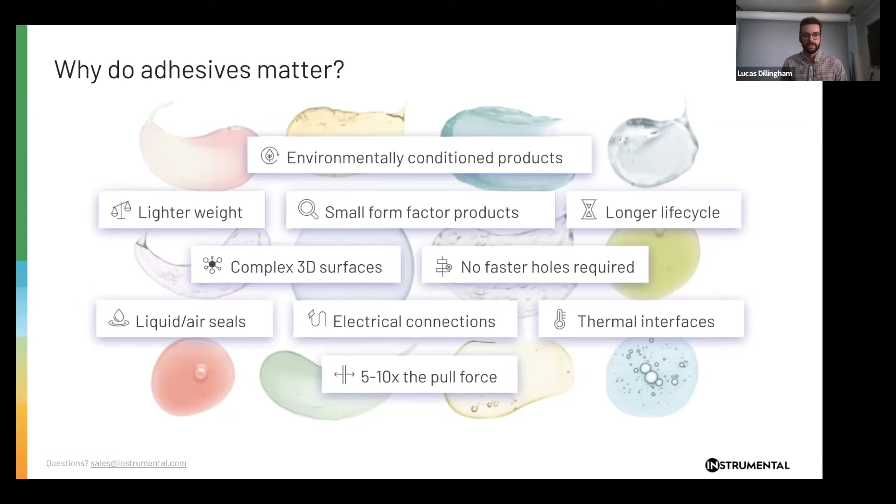Excellent. Well, yeah, the good news is very wide variety of applications, but with that comes a variety of different issues that we have to tackle. And just to give a sense of the scale of these issues, we collected 3 million data points from Instrumental customers. This is from ramp and production units over the past couple of years. And of those, the number one issue was glue issues. And this added up to about 0.7% of all units, so pretty significant.

And the types of issues, again, huge variety of different issues, overflow, missing, misplaced, all the common ones, and also some bizarre ones. And fortunately for these specific use cases, they were able to identify these issues with Instrumental and then address them, prevent them from actually being shipped. But for other applications where they might not have this type of coverage, this could be a significant number of issues that are escaping into customers' hands. Lucas, have you seen similar types of issues?

Yeah, I mean, we get involved a lot, I'll say in a firefighting mode, when a particular program is going through ramp or launch and they're getting adhesion failure, right? And it can be hard to pinpoint exactly where it's coming from. And if somebody were to come and ask me anecdotally, hey, what do you see? One of the things I'm going to pick up on immediately is, adhesion failure is a huge issue, right? And typically we deal with it. We try to figure out what's going on, but they're very hard to root cause.

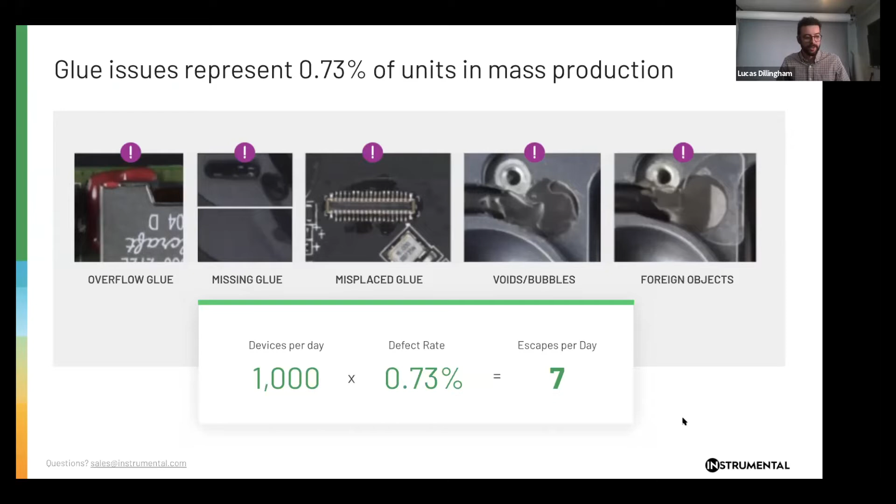Yeah. So let's talk about why is it so difficult? Why do so many different companies struggle with optimizing these glue processes? I can share one story that's burned into my mind from my days back at Apple. There was one specific application where we had a flexible printed circuit that was coming off the touch sensor, and we wanted to bond it to the housing. This is to prevent translation during a drop of the phone.

This was on iPhone. And the number of different variables that we had to take into account when we were optimizing this was just off the charts. Again, this was in a very tiny space. So we were looking at, even just to start off, the basic glue composition, different curing conditions, different UV wavelengths, then just looking at compatibility with the surfaces, contamination of the surfaces. And that's just the nominal.

Then you have to look at, did you actually dispense what you think you dispensed? And all of these things are very difficult to actually quantify, these kind of amorphous glue blobs. And the insane amount of resources that went into all these different experiments to optimize this one glue process still blows my mind. Lucas, have you seen a similar process elsewhere?

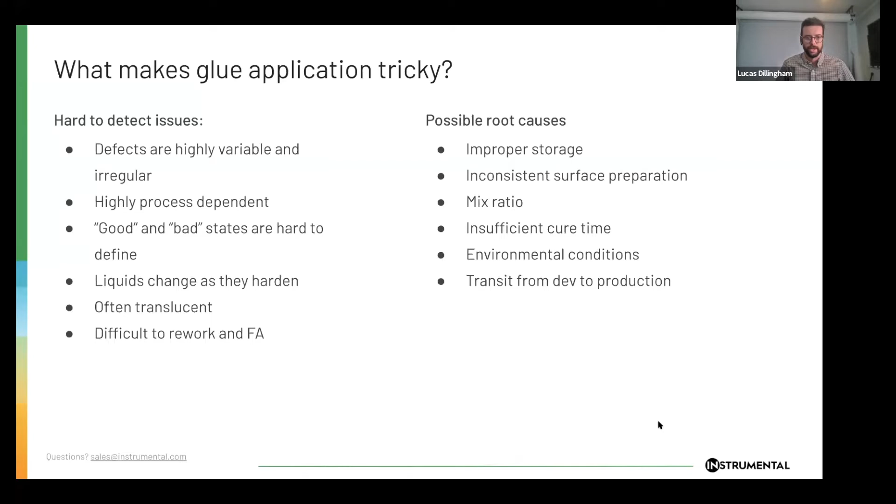Excellent. All right. We got a few questions. I was just going to answer one here. Is it possible to check if the wrong glue is being used by a CM, by Ahmed? There's definitely a lot of possibilities of how to do it. I think the question is how to do it consistently, proactively. I've used in the past, to check for contamination, maybe an FTIR to look at the composition.

Lucas, what would you say is the easiest way to double check what type of glue is being used by your CM? Yeah, to make sure that the appropriate glue is used, hopefully they're reporting what glue they're using and that reporting is accurate, but barring that, FTIR could be one way where you could actually check what is the chemical composition of the adhesive itself. You could put in some kind of requirement for them to send that.

As an example, in the aerospace industry, they will use XRF to determine that the metal alloy is appropriate. Say you're sourcing aluminum from a foreign country and that aluminum is going to go into a 787, you have to validate it with XRF to say it is the appropriate alloy and has the right structure. So there are tools you can use to do something similar like that.

Perfect. You just alluded to this, Lucas. Let's go back to the other slide just for a second on the failure analysis process, because this is really the heart of what makes doing FA so tricky. In particular, when something does go wrong after you've optimized all these variables, typically you need to disassemble the device to do your analysis. In my experience, either you use some heat to loosen the bond, or an extremely cold chamber. Then you could pop off, let's say, the front of a phone.

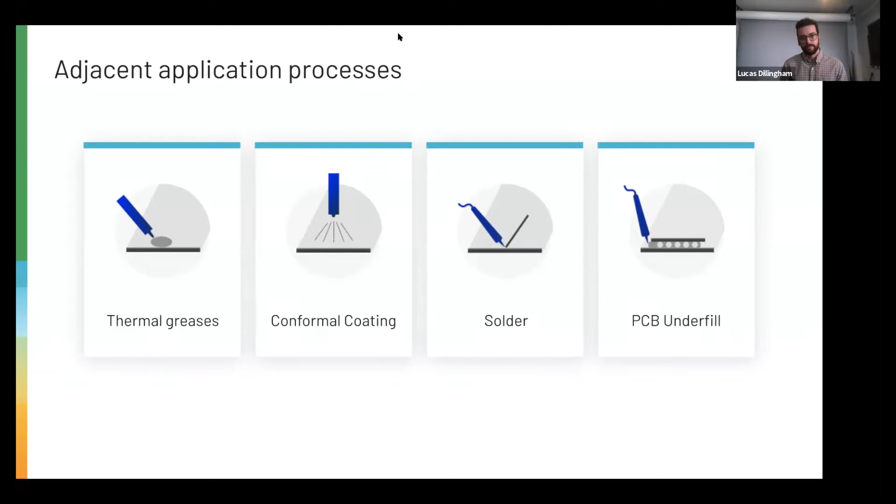Perfect. Let's go ahead.

So look, I can actually jump in here because I've got a couple slides here that are BTG Labs specific. And I really want to bring the conversation back to the perspective of an OEM or a CM trying to actually build these things day in and day out. And when we really break it down, there's two main problems in all of these processes, right? At least at the end of the thing.

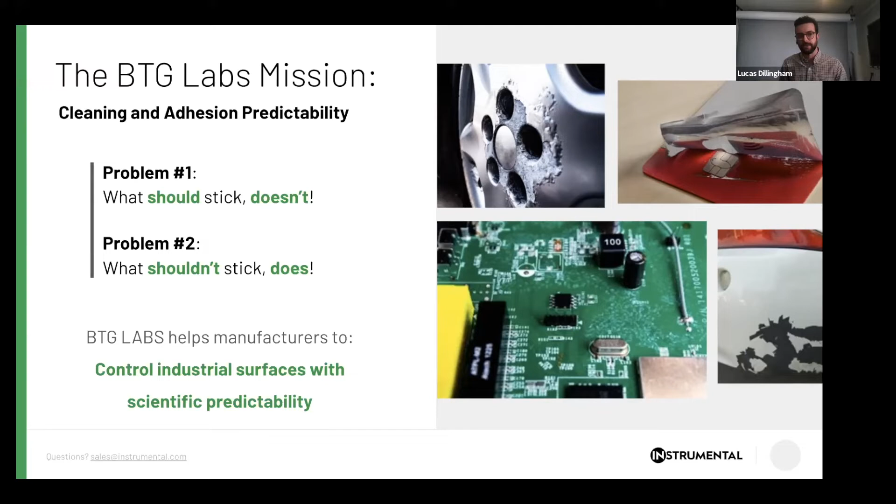Problem number one is that what should stick doesn't, right? Glue doesn't adhere the way you want it to, when you want it to, under the conditions you want it to. And then on the flip side, what shouldn't stick does, right? If we don't have an oleophobic coating that goes down correctly, or a hydrophobic coating, like say in a solder mask, all of a sudden we've got things sticking in areas that we don't want them to. And so BTG Labs' goal is to really help manufacturers control these surfaces with scientific predictability in the factory. We're going to get into how we do this from a technology standpoint, as well as some of the fundamentals.

So the way that BTG Labs approaches this is, one of the first things we've got to be able to do is provide access to surface quality data on the factory floor, right? And people really aren't doing this in a meaningful way right now. We combine that with expertise from a specialized materials and process team based here in Cincinnati, Ohio. We've got a lot of experience in process selection and optimization for how to prepare surfaces, how to apply particular adhesives, what adhesives to select. And then we've got a surface analyst platform that allows us to get objective data in a variety of manufacturing scenarios. So this is how we approach the problem.

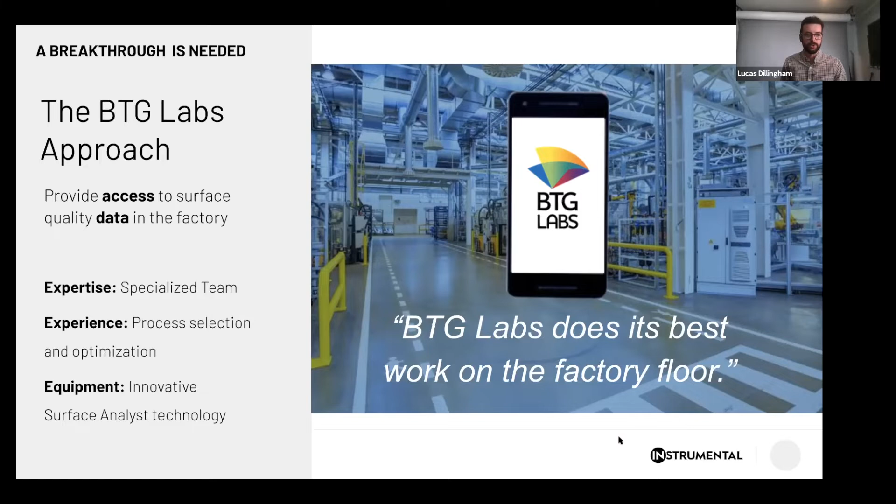So when we think about the life of a product team, and of course I'm highlighting a particular cell phone in this example, but this happens whether you're painting the Ford Bronco roof or you're trying to make sure that you don't put circuit boards in the Hubble telescope that are going to completely fall apart in space. This stuff has real impact, right? If we look at the Google Pixel, they had a major issue that was well documented, as consumers are wont to do, on Reddit and Facebook, about the back panel peeling off, typically right around the upper right-hand corner of the back panel of the phone.

So we get loss of consumer confidence. We've got a really high warranty rate, right? There were other issues with this phone as well. And then we've got the OEM implications of the staff trying to triage this, where say they're doing development in California, the CM maybe in China, trying to work through the time zones, the flights, trying to figure out what the heck is going on. And in this particular phone, it was so tough, along with a couple battery issues, that they discontinued it before even releasing the next product. So this was a major challenge for this manufacturer.

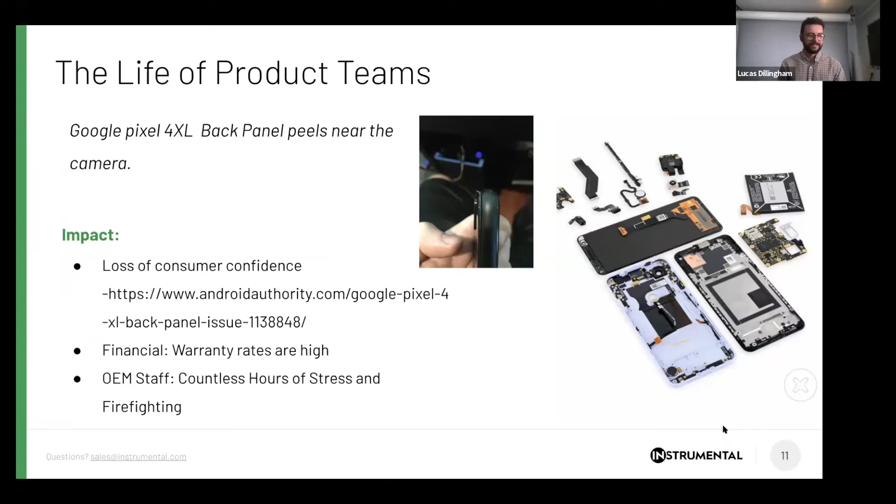So, I mean, this is something we've all experienced, right? Tobias has certainly lived it on one side of the equation. I've lived it on another side of the equation. But why does this really happen? And it continues to happen. And it really happens for two reasons. One is we lack predictability, okay? Production and reliability decisions are really reactive and experience driven.

Oh, we used this adhesive on the last program, let's go ahead and use it on this one. Or we used vendor A and we never really had too much of a problem, so let's go ahead and use them again with whatever process they decide to use. We don't have great objective monitoring and visibility of real-time surfaces on the factory floor, and we'll talk about how we do that here in a second. And really the adoption of smart factory tools has been limited in these particular applications, right? Which is where companies like ours and Instrumental kind of come in.

The other thing is we really lack a common language. You know, there's functional silos within the organization between, say, product development and manufacturing, engineering, and quality, right? Product development can set up a great bonding process in the lab, but then scaling that to a distributed supply chain introduces a lot more variables, and things always happen, right? You guys may have dealt with organizations in the past where there may be some tension between, say, manufacturing and PD because of previous misalignment, right?

And then beyond that, we've got misalignment among the supply chain, right? Suppliers may not really have a great understanding of what are all the process variables they need to be aware of, what are the surfaces they need to create to have reliability, say if they're creating that material and that surface and then shipping it to the CM for final assembly. And then we also don't have external technical cleanliness standards that really deal with chemical residues, really surface chemistry, which is a primary driver for adhesion success.

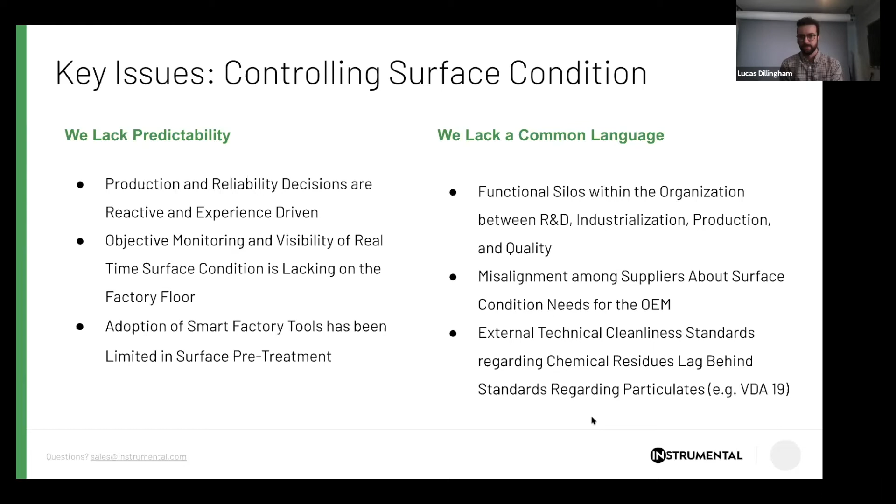And so it ended up being not an extremely useful metric because it wasn't aligned what the data means from there. Yep. You need to set baselines of kind of 3 key inputs that we'll talk about here on the next slide, and then scale those through either an SOP or product drawing or control plan or something like that. So let's talk about the 3 key inputs that we help manufacturers really drive to that get us to that ultimate reliability and predictability in a surface critical assembly.

One is the properties of the adhesive. Okay, the adhesive that you're buying from Henkel or Loctite or H.B. Fuller or 3M has to be controlled. And usually they do a pretty good job of this, even though Tobias did just tell a horror story of some PSAs he was buying. In general, they do a pretty darn good job. I mean, if you're talking liquid adhesives, Henkel's controlling monomer ratios to a couple %. And you get the batch and lot and manufacturing information of that. The second critical thing is the surface that you're going to apply that adhesive or coating or sealant to. All right, and really what matters is the top 1 to 5 molecular layers of that surface.

And this is a key point, and I will say a key hole in the understanding of this whole process that certainly CMs don't have any kind of sensitivity for. If I can see a fingerprint on a surface, that's 10,000 molecules thick, right, roughly. I really care about 1 to 5, 1 to 10 molecular layers on a surface.

And then thirdly, we've got the adhesive application. Do we have the right conditions for the physical application of this thing? Curing parameters, the environmental conditions, whether we're doing a UV curable or what have you, pressure, some kind of fixturing. And usually that stuff from the physical application side is pretty well controlled. So as a whole, steps 1 and 3 are being done pretty well, but step 2 really isn't, right?

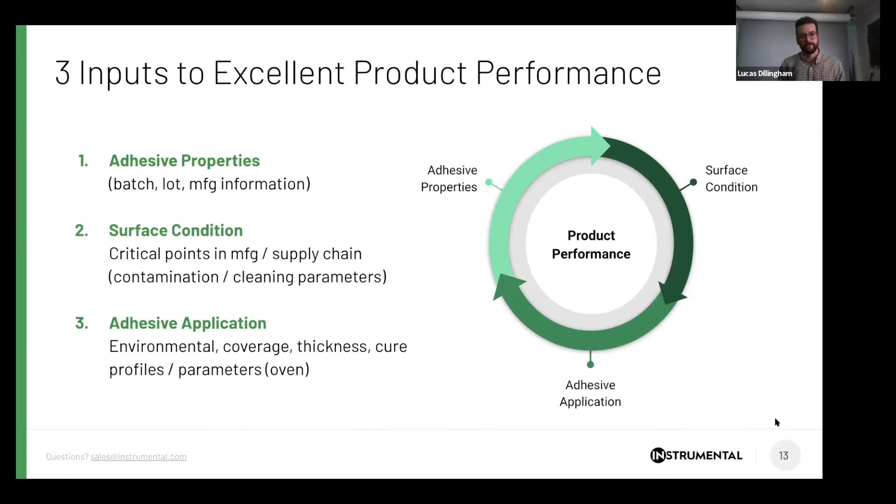So when we're looking at surfaces, and sorry, Joel, I didn't prompt you to change the slide there, but when we're looking at surfaces, we can break these things down into what we call critical control points, all right? And Instrumental has a very similar way of looking at this, where there are particular areas in our manufacturing workflow that can either create the surface we want, or they're areas of high risk where our surfaces can change negatively. So we have the incoming material that could be coming from a vendor or a supplier, or it could even just be upstream, say in the room over, the building over.

We've got storage and inventory and material handling of that material, right? We're going to wrap this thing in some kind of packaging material. It'll be maybe in a tray, maybe it ships in open dunnage, however it looks. We've got a particular cleaning process that we're going to institute, right? Sometimes we try to make our vendors clean, but then it gets stored and packed and handled, and then we do something with it. And then we may institute a surface activation step, right? So these four basic things are really where we see things happening all the time.

And Tobias, you probably have some experience here that you can share around this. Yeah. I think from my experience, typically it's a very reactive model, which is not great. We're working at that final step. We're working at final assembly. We have some tests in place, and something goes wrong, and only after the fact do we start tracing back through the supply chain and look at all the different points that could affect the end outcome here.

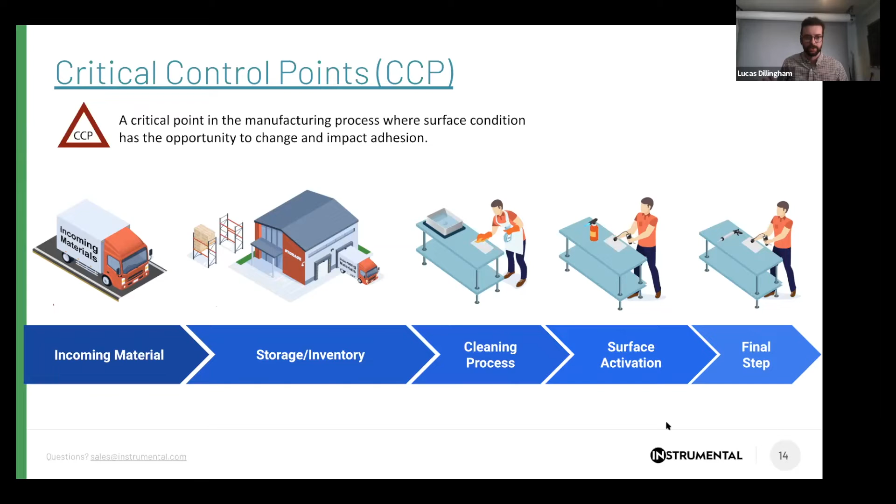So by building a digital thread through monitoring really these three key inputs, we now get to bring surface inspection and surfaces really into the digital age, right? All of a sudden, cleanliness and surfaces can really become part of your statistical process control plan. We get documentation, we get trackability, we get data aggregation, right? Tobias will be able to clue us in onto how we can take metadata around this.

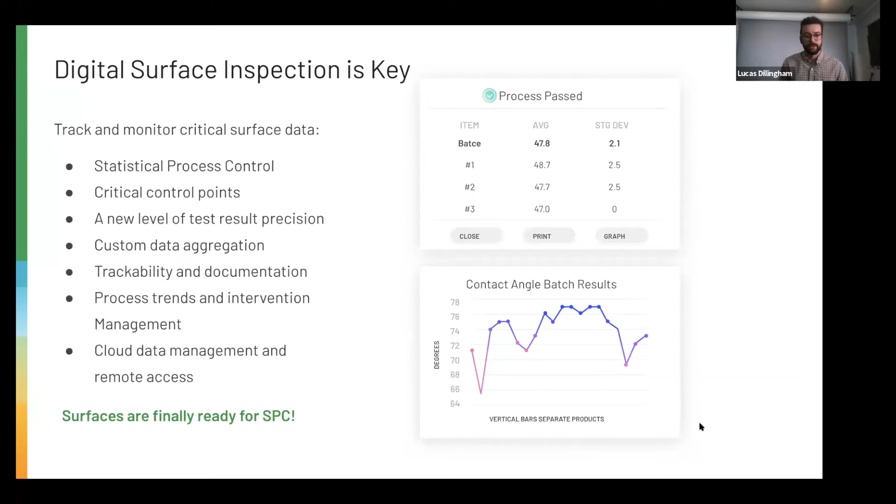Yeah, I'm excited to see the in-process 100% inspection. That's pretty impressive. I think you're going to talk about it next about how it works. But yeah, in my background, we never had surface quality 100%. It was always maybe you'd get the QC, the auditing, the 3 parts per batch. But I would say 90% of the time it was in reaction to something going wrong. Whereas this is a more proactive approach of you've taken learnings, you've taken expertise, and these are going to be the critical areas, like a more thoughtful approach to quality control.

Well, let's get a trend line. You know what I mean? Like, what happens during 3rd shift every Wednesday that causes me failures? That's exactly how it happens. Everybody's experienced glue issues, and we can sit here and talk about doom and gloom and everything's going to fall apart. But the reality is that most of it works, but there's this little annoying percentage that never really works, and you don't know when it's going to show up. And it's because we're not monitoring actually key parts of the process.

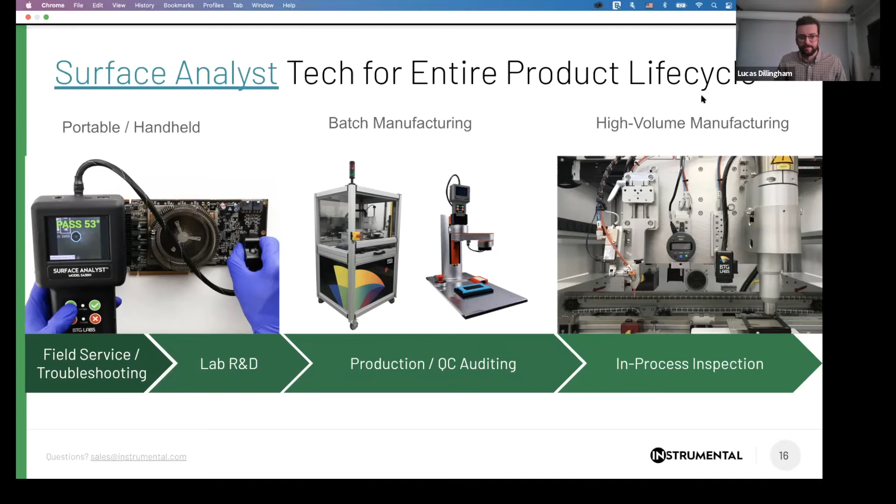So we can go to the next slide, Joel. So how does this thing actually work, right? So Tobias had actually mentioned contact angle. And contact angle is something that BTG Labs has used in our surface analysis lab for a long, long time. And it can be a great technique, but the problem is that traditionally it hasn't been packaged and industrialized in a way that allows us to use it in the manufacturing floor. And we do this in a pretty different way than traditional contact angle techniques. What we're actually doing is we're printing the droplet onto the surface. You can see this little GIF up here, and yes, I say GIF, I don't say GIF.

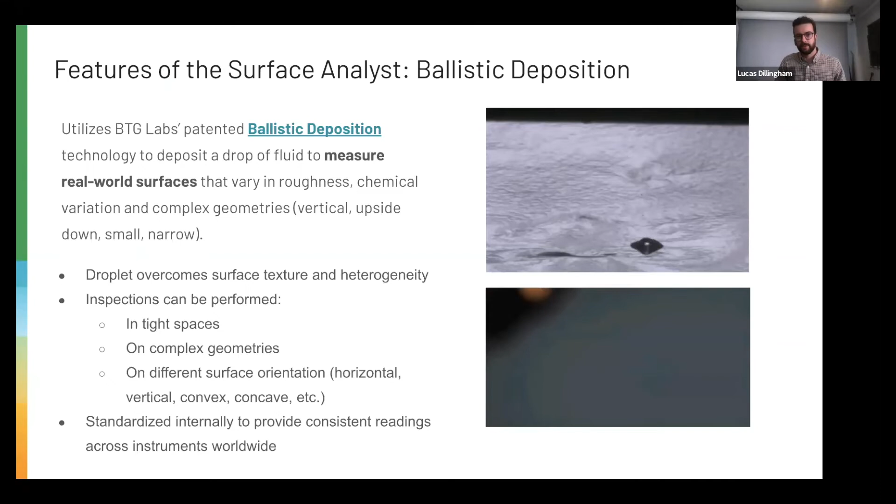The little GIF up here, we actually build a droplet through a series of micro droplets, okay? And what this does is this puts kinetic energy into the droplet. It overcomes roughness, so it overcomes different morphology. We can shoot this thing vertically. We can shoot it upside down into channels, on curved sections. So it makes our measurement extremely repeatable and very, very flexible. And the whole thing happens in about 100 milliseconds. You can go to the next slide. Oh, okay, sorry, I've skipped a slide here.

However, what's cool about this is if we understand what a surface is and what it means for adhesives and coatings, we can actually apply a number that we put to the shape of that water droplet that it makes on the surface, to the state of that surface. So let's take, for example, a metal component. And we machine that metal component, or maybe we laser etch it or laser ablate it. And when we do that, we have literally fractured molecular bonds. We've ripped molecules apart, and we have all these reactive molecular sites right there. Within milliseconds, we get an oxide layer that begins to build. Then we get a little bit of water vapor, some hydration, hydroxyl groups. We then begin to get some contamination after that.

And every time we have essentially a molecule attach itself to that metal surface, we lose some reactivity, we lose reactive sites. And as you guys go out and Google some of this, you'll see the jargon of this process, and it's really called surface energy. And surface energy is just the total amount of chemical reactivity that's present on a surface for it to do work. And surface energy in and of itself doesn't necessarily predict adhesion, but it's an extremely sensitive way to understand, is my surface the same? Where am I on this scale? Am I still at my native oxide layer, or do I have a bunch of organic contamination on this thing?

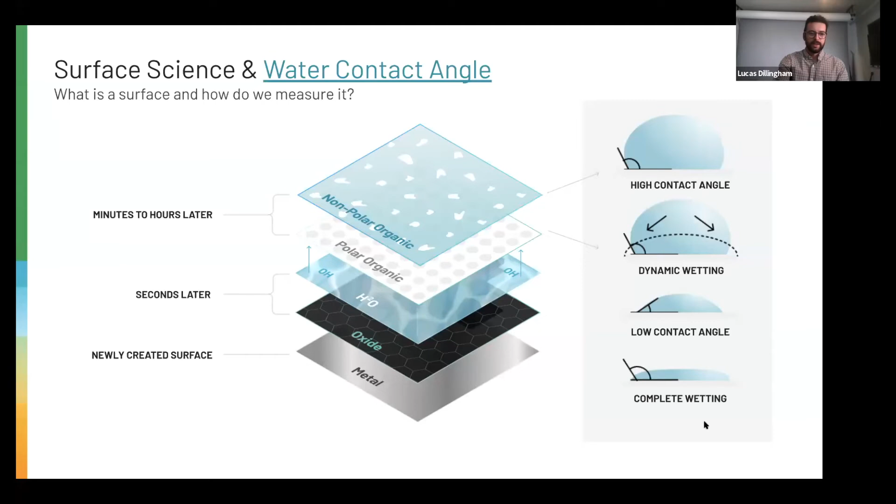Ahmed actually has a really cool question here that we'll get into just a little bit, but basically, right, the higher energy our materials are, the more they attract that water droplet to the surface. So the more that water droplet's going to wet out. The less energy that's available on that surface, the water molecules are more attracted to themselves than to the surface. And so it's going to start to bead up. All right. And the number that we return is the angle that the perimeter makes with the surface. The lower the value, the more it's spreading out. The higher the value, the more it's beading up.

Because it is sensitive to the top 2 to 5 molecular layers of a material, some variability is normal. It can be tough to create surfaces in manufacturing that have variability better than ±2. The best that we ever see is on silicon wafers, which we can get to ±1. But for an industrially prepared surface, like something that's solvent wiped, say a piece of aluminum or polymer that's solvent wiped, ±4 degrees is pretty normal.

So how do we apply this, right? We've talked a little bit about this. The PD or R&D uses this to help set standards on what surfaces should be where they've gotten good results with their adhesive or their coating. QC auditing can take that information, right? Once it becomes, say, process of record or in the drawing, they can take that information and use it to make sure that as they go through ramp and as they're producing over time, things aren't changing and things are as they should be.

And then obviously we've got the in-process monitoring piece, which allows us to get some statistical trends and really make sure that we've got an IQC spec and OQC spec that allows us to make sure that we don't get failures, certainly in the field, right, at the consumer level.

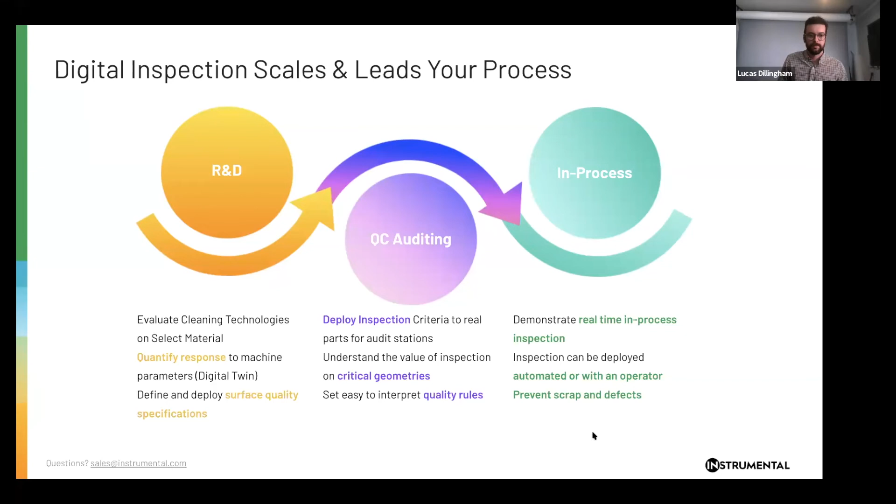All right, let's talk about a real world use case, an application. An Instrumental customer, P2I, they developed this nano coating for waterproofing electronic devices. It's actually pretty impressive. It's a little different from traditional waterproofing. They expect the water to get inside the device, and then they nano coat this very thin coating over all of the critical PCB components to prevent shorting and corrosion.

And what this means is the coating quality has to be perfect. Otherwise, the whole functionality of the coating is gonna degrade. So very, very tricky application, and they were struggling to find a quality control system that could address this. And so that's when they came to Instrumental. Lucas, have you seen a lot of these nano coatings coming up recently?

I mean, certainly, right? Anything that's going to be operated in the environment has to have, I'll just say moisture protection or moisture barrier, right? So traditionally conformal coating has been done for a long time on PCBs. That's one way to accomplish this. But then you've got this other piece where you have multiple components that have to come together, and then you kind of want to also coat the outside, right? To just help from water ingress in general.

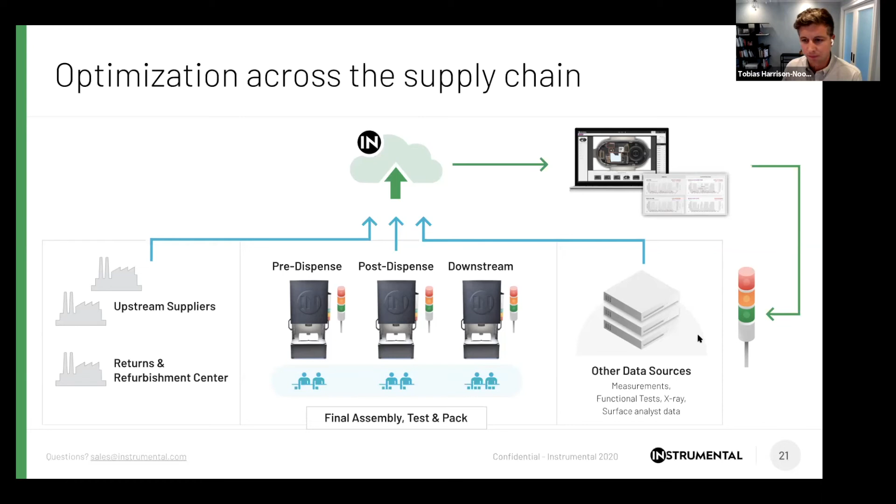So P2I, they had tried visual inspection, but of course, that's a little bit subjective. There's tons of things to inspect. And the other vision systems weren't performing to the level that they needed. And so that's where Instrumental's system came in.

Yeah, typically in coating applications, and this is really pretty true for whether it's conformal coating or even painting, we're typically not running into problems where sheets of a coating are just kind of flaking off. It's usually bubbling defects or fish eyes or de-wetting. Different applications will use different jargon to describe very similar failure modes.

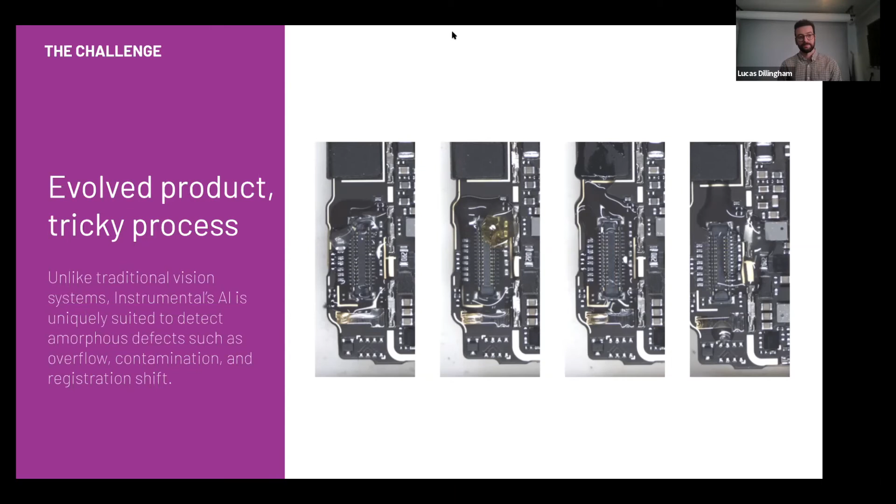Also, when you get real thin, then you have a hard time not developing pinholes. And that's not even necessarily a surface energy issue. But on real thin nano coatings, for example, pinholes can be a real issue too. So yeah, totally, all kinds of stuff can pop up. All right. Let's go on to the next one here.

And again, individual defects: their entire board had a crazy number of different components and dispense patterns. So it's a whole lot for either a manual operator, or if you're going to try to pre-program, it would just be an unfathomable number of different tests. So with the Instrumental system, the AI just looks through all the images for you. You can see here on the grid, it highlights automatically areas where it finds an anomaly. So it's proactively identifying these new issues for you.

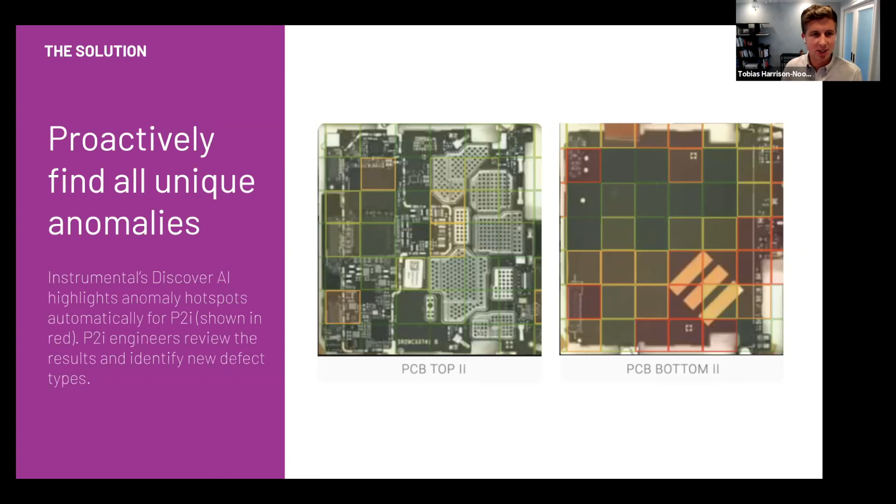Again, because you might not know exactly what that defect in the glue is going to look like, because each time something new presents itself. And that's just the nature of glue: it's very hard to inspect. So they were able to find these issues early.

And another key part about this, the P2I team was actually fully remote while they were doing this development. So Instrumental served as a centralized collaboration platform. Their factory was over in China. Their headquarters was in the UK. And then they also had some remote team members in the US. And so they were going through this product development cycle completely remote.

So they took all this data in the Instrumental system, and from there they had dashboards. Joel, if you progress a couple here, they had dashboards to allow them to monitor their quality remotely. They were able to tune the processes using these images, update some of their dispense patterns, again, remotely. The quality team could monitor the top issues. And then in the factory as well, they were using it for a live go/no-go for some of the defects.

And the results. Tobias, I'm sorry to interrupt, but there was actually a question that I personally had. On average, how many images do you have to take before you can start having the AI make some determinations about what the hotspots are? Oh yeah, great question from Emily there. Our system is actually designed to be used early on in development. So we just need 30 units to get started. With P2I, for example, tuning their processes early on, starting in prototype and EVT builds when there's a lot of variability earlier in the process, so they can tweak those processes.

Mm-hmm. And same if we're ingesting data from the Surface Analyst, we don't need that many data points. Just getting 30 units, you can start to find correlations between images and maybe some of the outcomes of the surface properties or some adhesion pull tests later on. Mm-hmm.

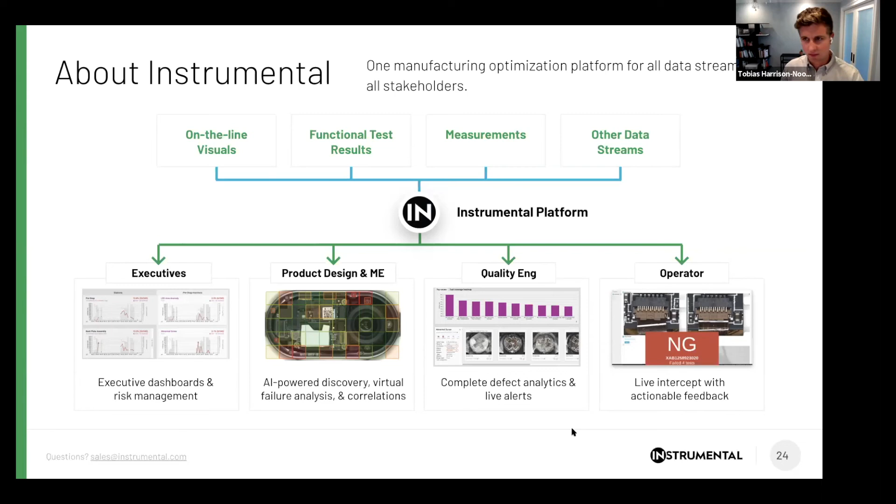Let's talk about the outcomes here. So again, P2I was setting out on this new development of this novel technology. Their teams are remote, and with the Instrumental system, they were able to successfully make it through their product development on time and actually ship this new technology. Their engineering team's efficiency tripled due to being able to use this tool. They were able to reduce the in-person operator headcount.

So not only is it a more reliable inspection than visual inspection, we're actually able to reduce the headcount, as well as reduce the quality escapes that were making it downstream, where we also had Instrumental coverage, so we could trace it. And again, the impressive part is all of these metrics were hit during the pandemic. All of this was done remotely. Supply chains were getting disrupted, but they were able to get all these improvements by properly utilizing this data and this tool for remote management.

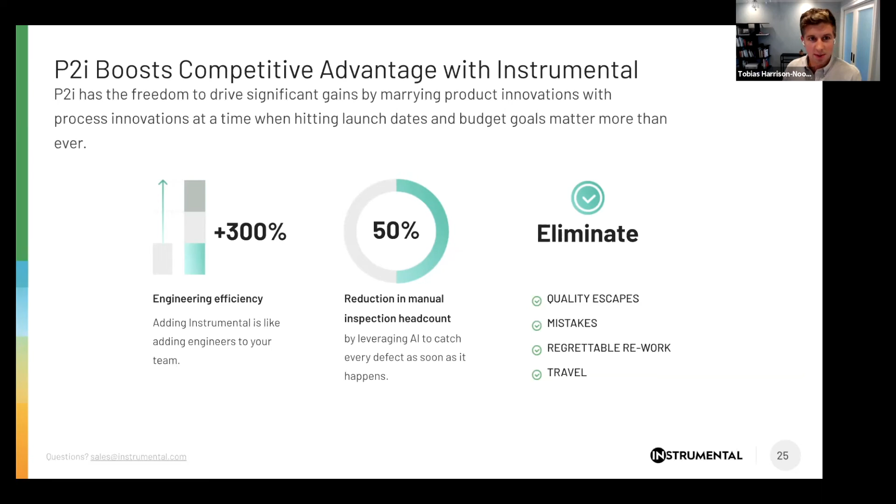Nice. And I like how you phrased that, Tobias, regrettable rework. All rework is regrettable. Regrettable rework, yes. It's always regrettable.

All right, excellent. So we hit on a lot of things: the best practices for setting up your line for collecting the data, for optimal adhesion, some actual applications, some different tools that you can use.